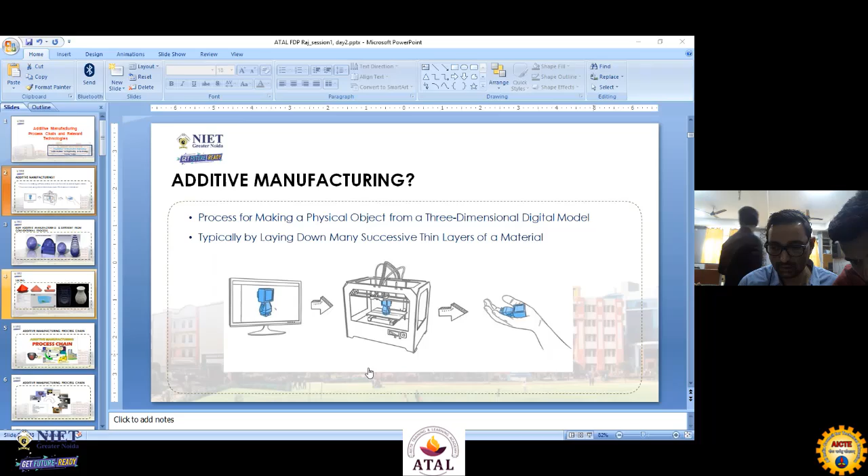So if we are talking about the definition, we can say the process of making a physical object from a three-dimensional digital model is known as additive manufacturing, typically laying layer by layer, laying down many successive thin layers of material. This is also known as additive manufacturing, and additive manufacturing is also known as rapid prototyping.

There is a story behind it. Actually, this started initially in the early 80s with the invention of the photopolymerization process. Earlier, the thing associated with the technology was only prototyping. In earlier days, prototyping was the main concern for the manufacturing sector. In those days, prototyping was done with the help of manual operations, like some cutting, some sectional cutting tools were there, and joining them together to form the 3D object.

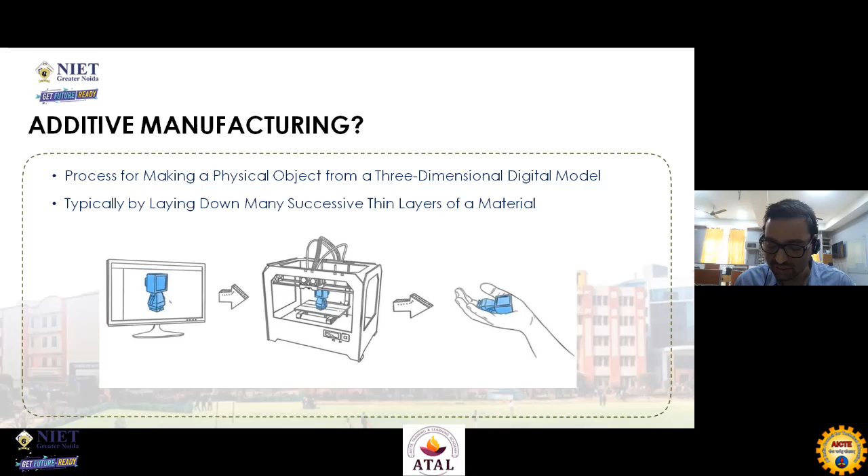They can convert their digital models into physical models. So this is how it transformed from its early stage, and today we know this technology by the common name of 3D printing. So this is all about the brief idea of how this evolved from a certain set of technologies to a number of technologies.

So here I want to say some differentiation between the two most common technologies among us. These two different technologies are, one is considered as subtractive manufacturing, and the other is considered as additive manufacturing.

Subtractive manufacturing is more relevant to the tooling side. If you look at this particular image, to achieve a specific shape, you should have a shape with you that can be transformed with the help of some machining operations. So machining is more involved. A lot of material can be washed out from the specimen with the help of some tooling operation, like cutting or grinding. All those operations remove material from the specimen to achieve the specific shape.

But the approach with additive manufacturing is very different.

So if you look at the approach related to additive manufacturing, it's very different, which creates the object by deposition of layers in a predefined thickness. That predefined thickness could be anything, which would be further dependent on your material and your technology, whatever technology you are going to use.

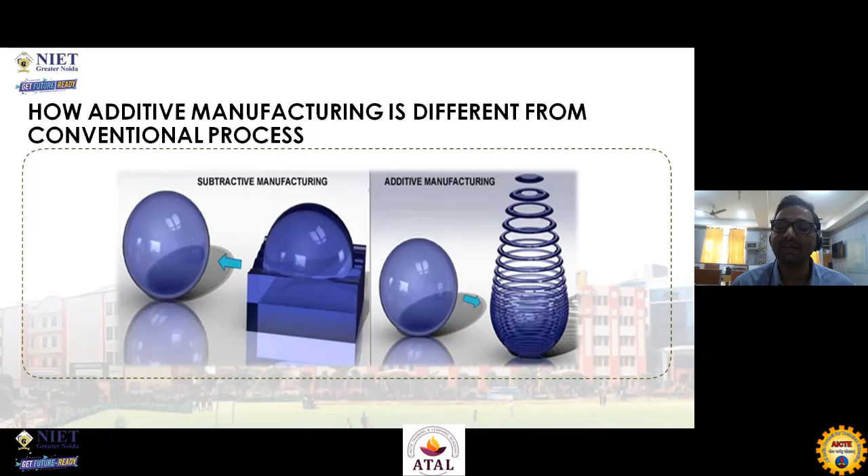So this is something which is related to additive manufacturing, which is the most important thing in additive manufacturing. Actually, there are various operations, started from the design. The basic need to create a 3D object is a design, which is also a necessity for all different manufacturing processes, so this is also required here as well.

In this particular process, one is the pre-process, which is the design phase. Then there is a building process, or you can say part generation process or transition process. And then you will have some post-processing operations along with the different approaches. We will be discussing that process chain, but slicing is the important part here.

So here you can see there are three different pictures. One is just to make you understand the object is like this—this is our object. You can consider it a digital model. Here you are doing slicing.

Slicing is just similar to cutting a potato and converting it into chips. If you join the chips together, it can give you the appearance of the potato—if your chips are arranged in the right order, joined together in the specific order they were initially in with the potato.

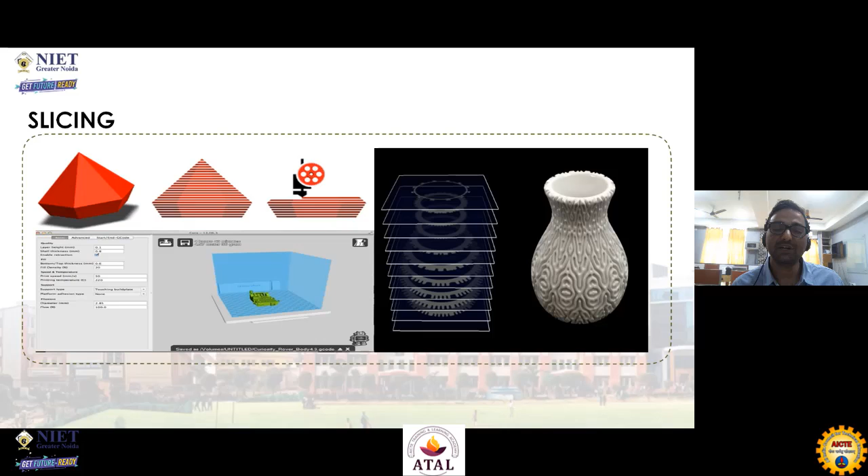So it starts with a 3D model. So 3D modeling can be taken place with the help of your CAD softwares. So CAD softwares are also associated with different categories. There are like some parametric CAD, some artistic CAD softwares are also there.

Like there are variety of CADs. Some CADs are associated with some sculpting applications. Some CADs are associated with jewelry based applications. Some are related to architectural applications. And in the same manner, the broader way of using CAD is your parametrics.

So there are some CAD softwares like Creo, Unigraphics, or you can say NX software, which is similar to Unigraphics, and then CATIA, SolidWorks. All those softwares are parametric CAD software. Then there are some artistic CAD softwares like Max, Maya. These are known as artistic CAD software, but they are all termed as the design softwares.

We call them in a generalized term a design software, but there is a lot of difference because in some softwares we create the part through some specific parametrics like vector geometries. Some parts we create out of some mesh structures, so through the mesh we create the components. So there are different differentiations among the different CAD softwares.

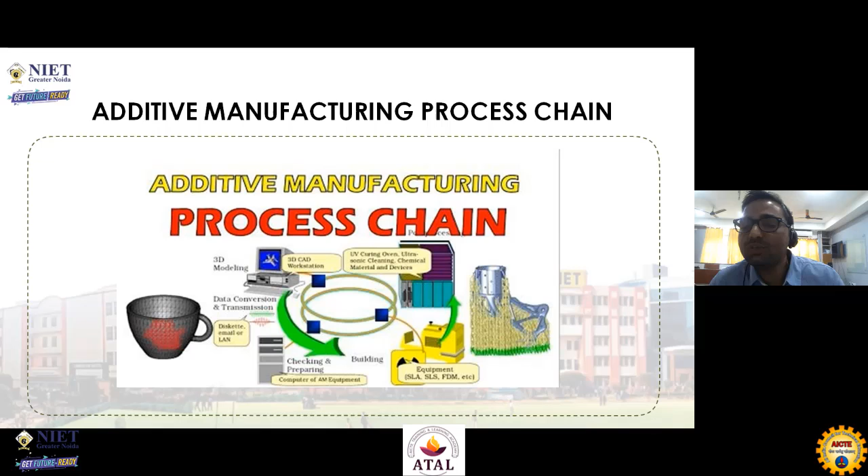This is a broader way of looking at the different process. If you look at this particular chart, you must have seen it before as well, but this will give you an idea how the process works from scratch. So the scratch part is the CAD part, which is obviously the design part. Then the design can be further converted into the STL file format.

You must be thinking that if people are aware, then it is great, but if somebody is not aware, I will mention one more thing. There are some terms like STL. STL is nothing but the file format which is associated with the mesh family. Mesh is a file format which has triangles in it over the surface.

While you are having a surface, like when you are exporting a model in STL file format, it will be converted into fine triangles. The number of triangles will cover it, and the more the number of triangles, the more the resolution will be with the design. If less the number of triangles, then it is totally dependent on your chord length. Chord length is the side, or you can say a vertex of your triangle, in layman terms, but it will be totally dependent on your number of triangles. If your number of triangles is more, then your resolution will be high. It can be understood with some further slides, which I will explain.

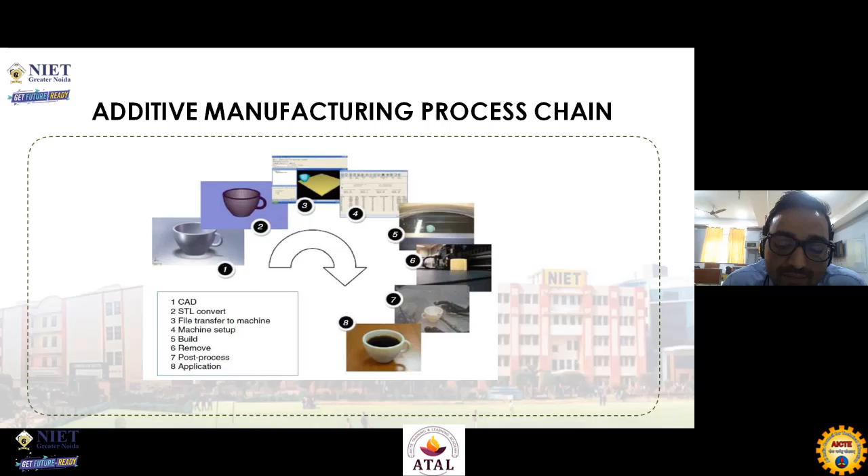So in order to do the resolution, triangle distribution is not dependent on the size of the triangle, it will be dependent on your resolution. This portion is again associated with the specific application. If you are having a single square or rectangle surface, you will find only two triangles over there if it has a plane surface. But if it is not a plane surface, the distribution of triangles will take place according to the resolution. So resolution is the important thing here.

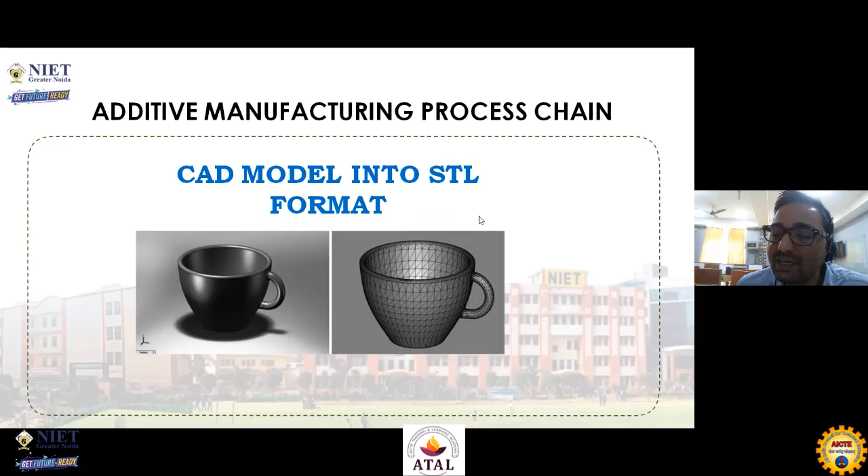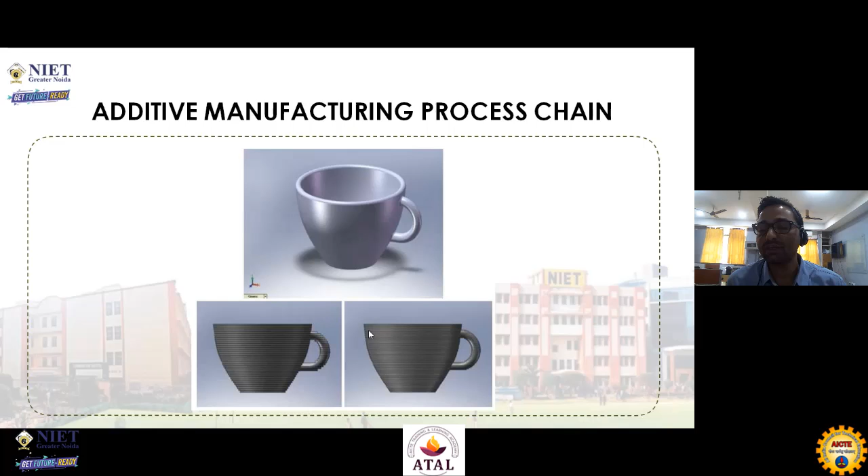That plain surface can be deposited in the z-axis. If this is a curvature surface and this is a plain surface, the plain surface can have higher or lower resolution, but that surface should have the higher resolution. It means the layer thickness at this particular section should be higher, lower, and at this other section should be higher. In that way, you will save some time in order to build the component. This is how we implement additive manufacturing specific design rules in the process.

Then the software is also very important, because the software itself has the capability to accept those designs according to our requirement, our application, and our system. Software has that potential. So these are the design rules which we follow. Design considers those rules, and the software together gives you a design related approach.

Then the further process is related to your system. Your system will have three further things: one is your hardware, which is known as the system, second is material, and third is process parameters. It is just similar to your computer, which has software with it, like an operating system, in terms of material and process parameters in terms of your process, whatever process you are doing with your system.

Like when you are playing a game, according to the game you will choose your processor. In the same manner, your system is there. System means whatever system you are using, it is SLA, SLM, or EBM, MJF.

FDM, or whatever system you choose, will be dependent on your application and material—whatever material a machine is capable of printing. If you have an FDM machine, can you print titanium? No, it won't be possible. So all three things—system, material, and process parameters—depend on your application. For example, if your application is biomedical, you should have a biocompatible material. You'll choose the biocompatible material, then choose the system capable of operating that material, and set the process parameters accordingly. All three things are interdependent.

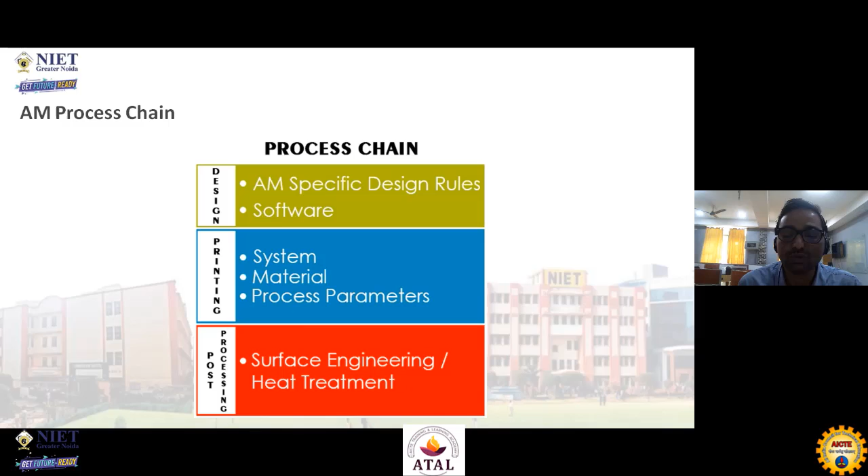So there is another thing associated with modeling which I believe I have already explained. There are some softwares associated with parametrics, some associated with artistic design, and some associated with 3D scanning operations. With the help of 3D scanning, you can do the scan.

There is a process known as CT scan. CT scan is a volumetric scan kind of process. In normal scanning, it will capture only the surfaces of that particular object, but in CT scan, it will scan the surface by volume, layer by layer. You can set up the number of contours with the CT scan machine, then it will capture the whole surfaces layer by layer, and in that way you will have the internal parts as well.

Those parts can further be exported into a DICOM file image. That DICOM file is a medical file format that can further be converted into STL file format. In that way you can also achieve 3D printing. Mostly you will be getting the outer surfaces of the component; the rest you can control according to the technology, like whether you want to fill it with 100% material or partially fill it. That will depend on the technology.

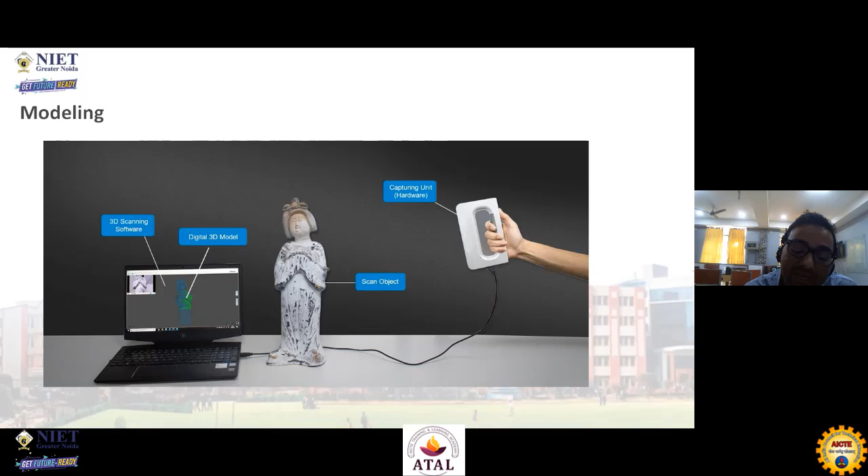So there are some advantages related to this technology: complex shapes can be created, freedom for design is there, and customization. We will show you some examples so that you understand what these different points state.

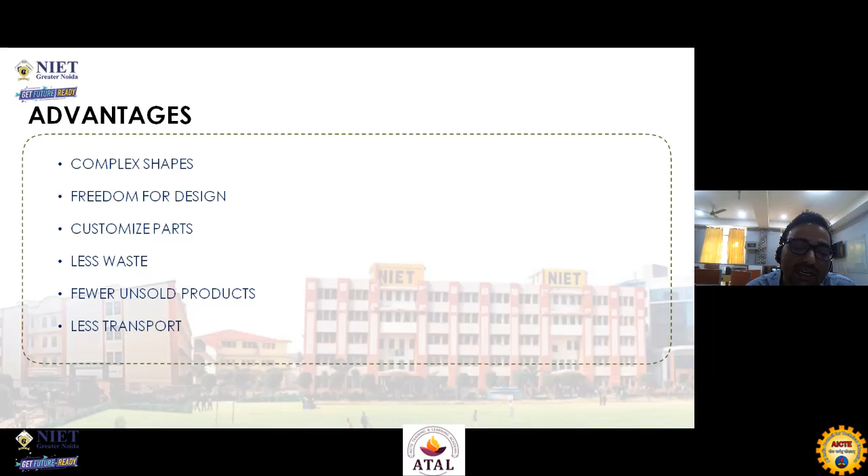These are some complex shapes which you cannot create with the help of conventional processes. You can create them with additive manufacturing, because these are very complex shapes, and even these complex shapes can be designed with artistic software. You cannot create those designs with normal parametric software. If you try to create these shapes with conventional processes, either it is not possible, or you have to incorporate a lot of tooling operations.

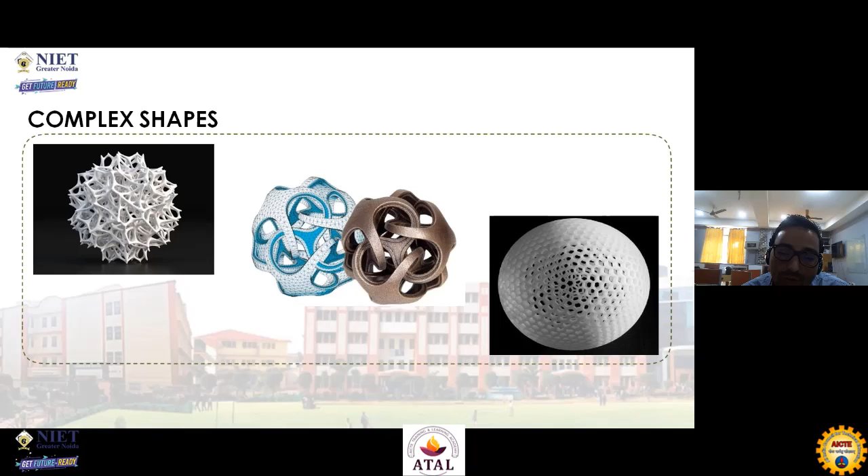These are some examples related to freedom of design. You can do it in the fashion industry, whatever the shape. Sometimes you want a product to be built that is not available in the market, but you have a feeling like, if this kind of product could exist, then I could do my stuff in that way.

In this approach, you can go with the additive manufacturing approach. Whatever you are thinking now, by the next day you can turn it into reality. Whatever application you are thinking of in your mind, you can convert it very soon. The process is not slow nowadays, it is very fast. If you look at the market, you will find that a single segment of a particular automobile industry will have a lot of different options—if a company is driving two segments of a car, then a single segment will have a number of cars in its portfolio.

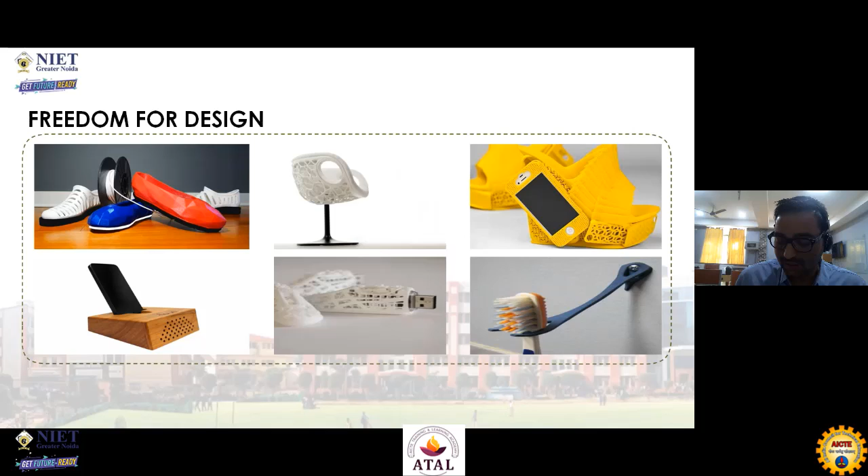These are some customized parts. Customization could be there according to your requirements, which was not possible earlier. With the help of this technology, and obviously with the help of design—because design is the most important thing in this whole process, the primary and basic thing—on the basis of design implementation and the capabilities of the technology, you are able to create customized parts. Those customized parts could even be better than the actual components, if you compare them with the natural leg or limb of an individual.

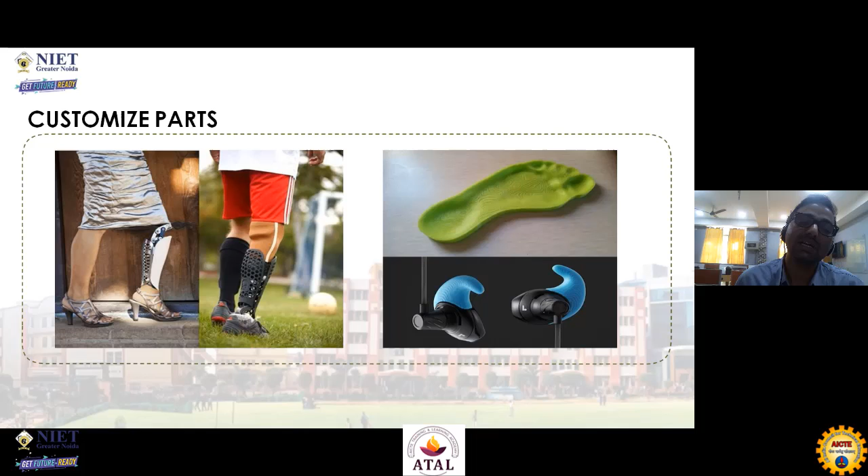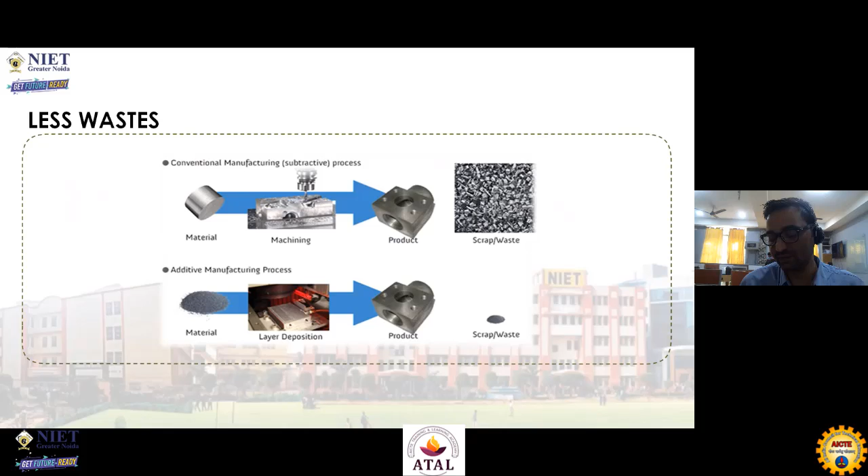Less transport. Here I would mention one thing: if you have a car, your car has a spare wheel. For the worst scenario, you carry a spare wheel and some tools with you, like a jack and a spanner, for your safety while driving on the road. And if you are driving on the road, you will hardly be 10 or 15 kilometers from a repair shop.

But if you are traveling on a ship or a spaceship, there is a difficulty in carrying spares. If you carry only a single spare, it will not solve your purpose. You have to carry a great inventory of spares. So in order to reduce that cost, carrying that inventory will obviously fill some space and also affect the overall weight of the ship or spaceship.

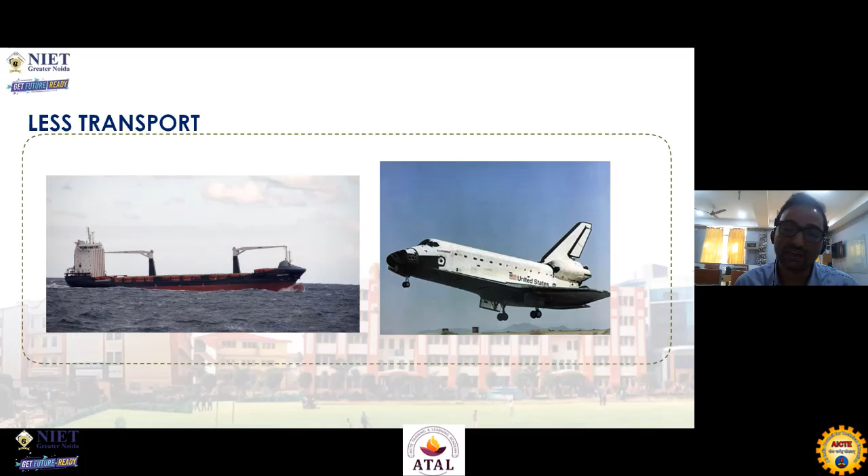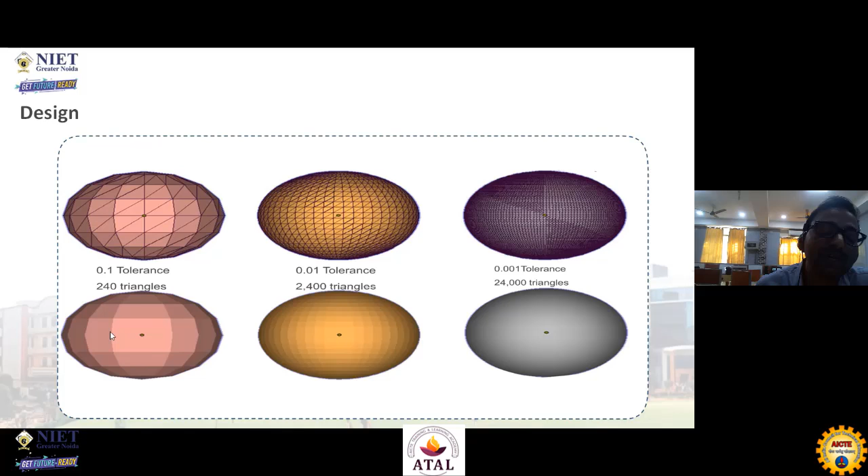Here is a case study related to conventional design. If we are transferring a conventional design more towards the DFAM favor - if you are having a conventional manufacturing process, then you will be having a conventional design. This is a pedal of a cycle.

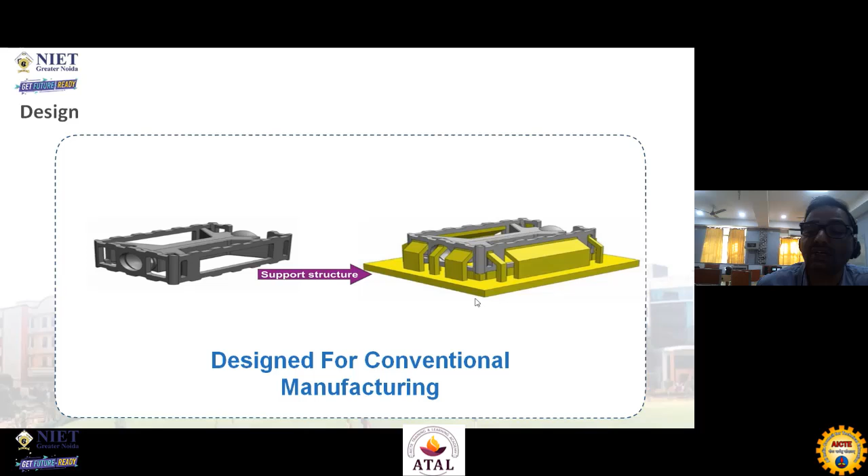If you transfer the same design to the additive manufacturing process, you will find a lot of support structure, and that support structure is further a wastage. You can do some modifications on the component to reduce the support structure, but those modifications further increase the weight of your bike pedal. So that bike pedal has increased its weight, but has almost removed the support structure, except this.

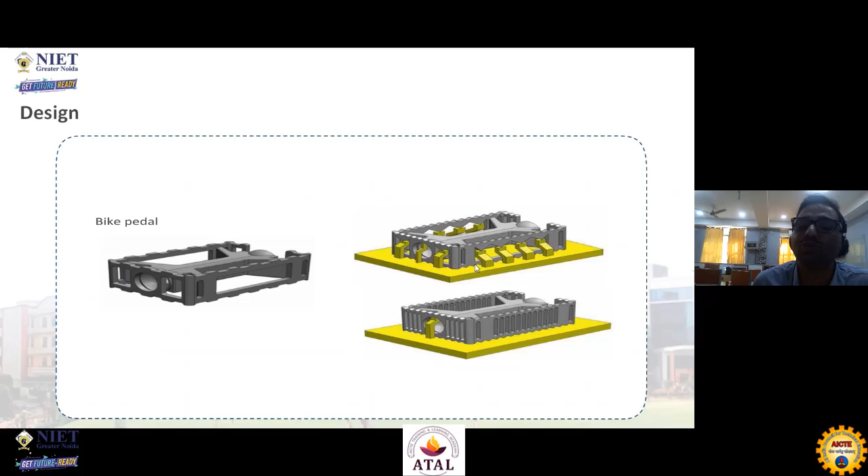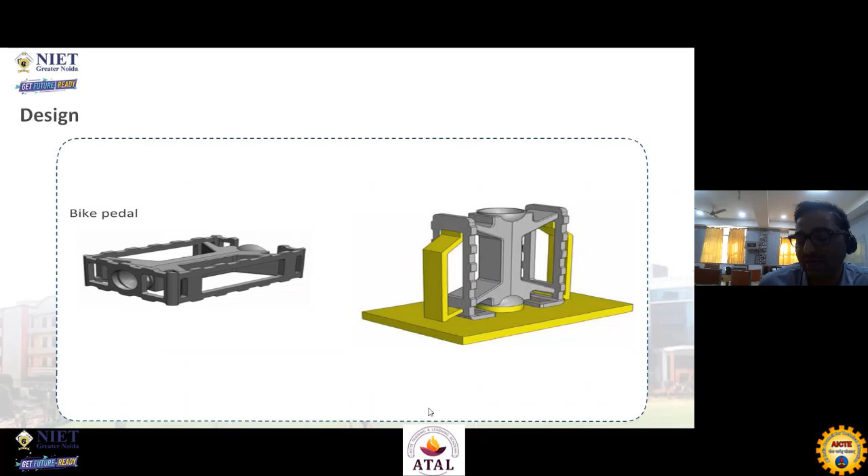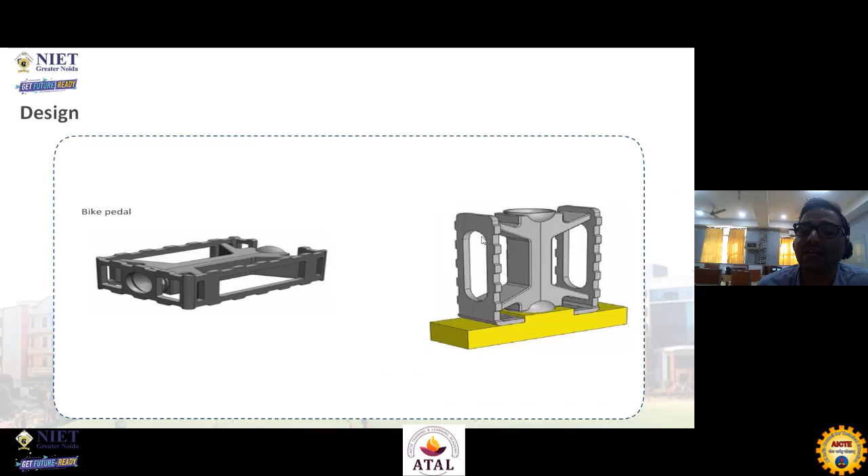You can further deal with some orientation, since we have the capability to play with orientations. So you can orient the component in a specific way - earlier we were printing it in the flat format, but now we have oriented it. With further modifications, there's a reasonable amount of weight increment that is not harming much, but we have reduced the support structure at this point. Still, it is a conventional process, and we have to increase some weight, even though we have switched to the additive manufacturing process.

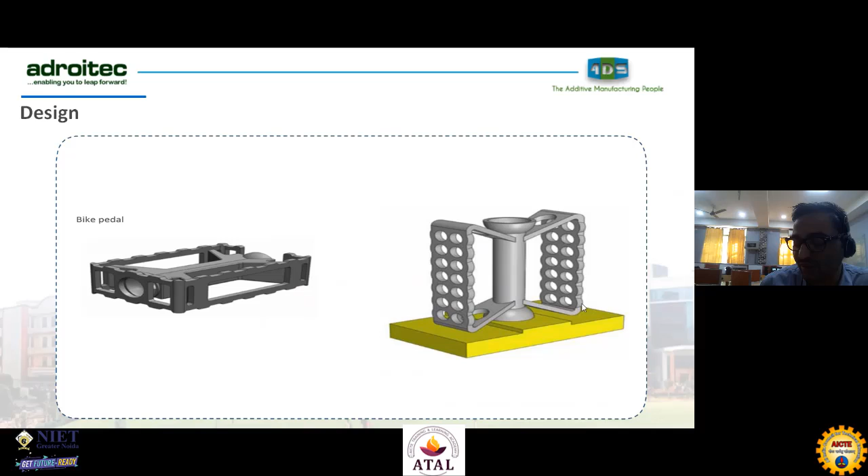But why can't we use a design like this? Because this kind of design is not very feasible with the conventional process, as it will increase your efforts there. But in the additive manufacturing process, there are no such limitations. You can create designs like this, and even more attractive designs than the previous one, without creating a support structure. You have all your choices. So this is how DFAM, along with additive manufacturing, lets you improvise different designs which already exist in conventional manufacturing.

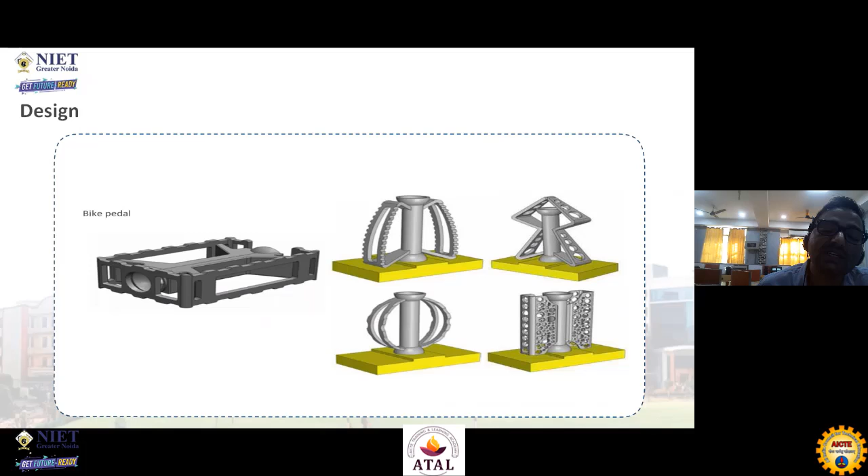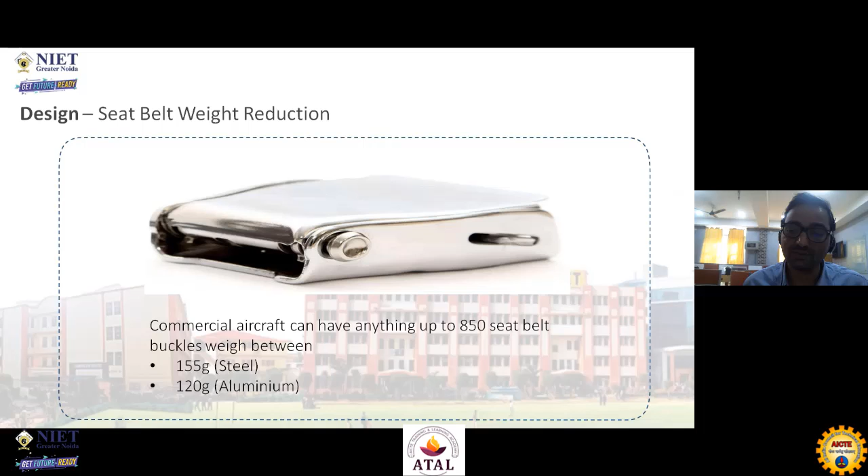If you make this design with a conventional process, it will involve a lot of processing and your effort will increase. But if you do it with the additive manufacturing process, your material will reduce with no strength compromise at all, and you will save 68 grams on every seat belt buckle.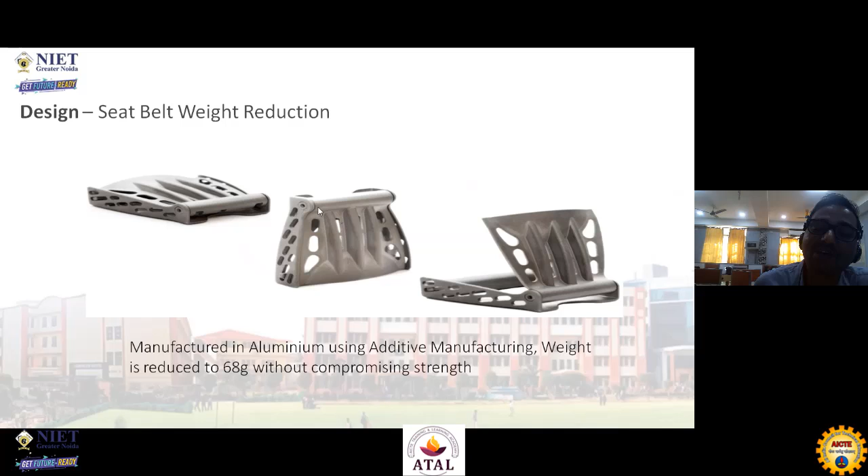These are some applications associated with additive manufacturing: automotive, marine, aerospace, medical, dental, prosthetic, engineering, architecture, and many more. These are some popular applications, but there are many more - food industries, tissue culture industry, medical industry with its subcategories, and aerospace also has its own categories. So there are different industries - you can find it everywhere.

This is one technology related to liquid-based additive manufacturing systems. In liquid-based additive manufacturing, you have the stereolithography process, also known as the vat polymerization process. I will explain only the principle - the working, as we are running out of time, we cannot discuss at this moment, but I am explaining the principle here.

The tank is filled with liquid polymer, which is in the form of a monomer. So liquid polymer is nothing but a resin which is a monomer, and that can be cured with the help of a UV light source, and that curing will turn that particular monomer into a polymer. That process is known as polymerization. So photopolymerization has a light source which acts as a catalyst for the monomer, converting it into polymer, and that polymerization gives you a solid shape.

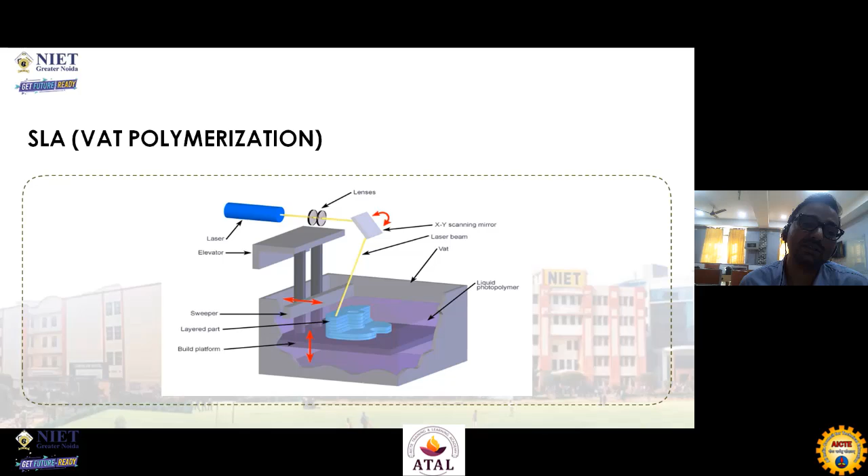Then there is a material jetting process. Material jetting process again can have your monomers with you, that resin material with you. That resin material can be deposited, and your head can have some fusing lamp. That light could be a UV light. With the help of that it can set.

Apart from that, you can have some different material, slurry material, that can be deposited. With the help of heater or the blower, that can be set. So this is how this will work. This is the mixture of your FDM technology and the SLA technology. Or you can say there is a spray which gives you the impression of the FDM technology.

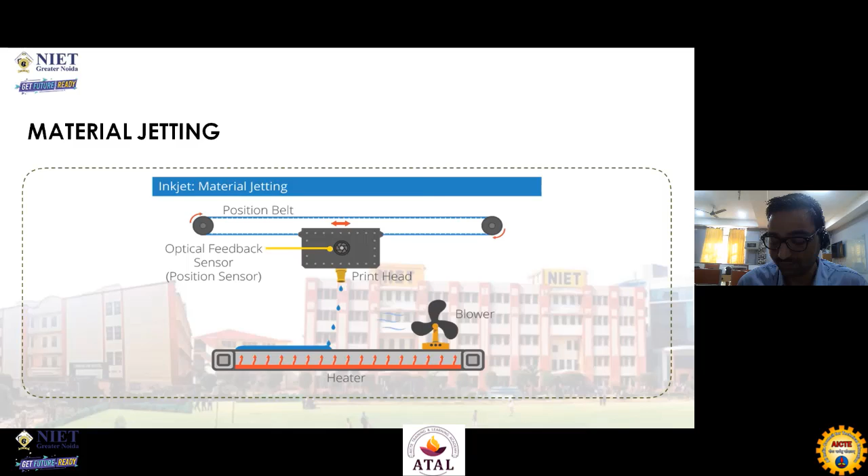And this is SLS process, where the sintering process is being carried out. So with the help of a roller, we deposit the material at a specific layer height. That specific layer height will give you the layer resolution of the component.

And the beauty of this technology is that in polymers you would not require to create the support structure. So the support structure will be compensated with the help of this powder material. So powder material will allow you to give that support to those overhangs. So this is the beauty with the technology.

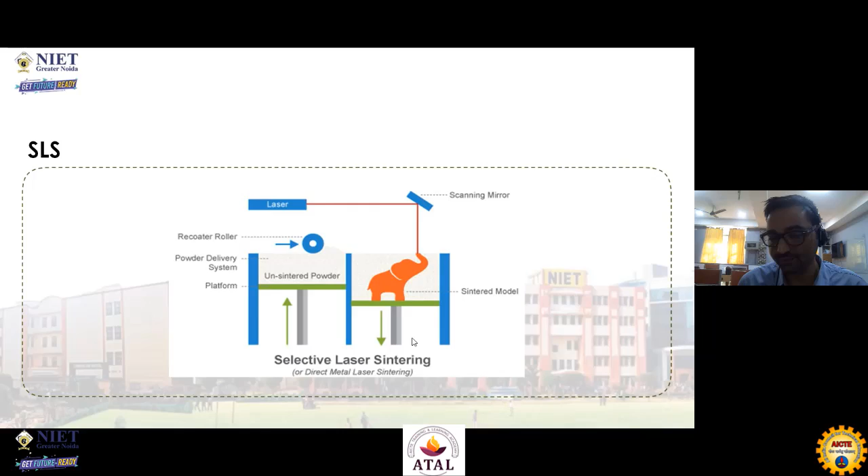This is the binder jetting process. This is similar to your SLS process, selective laser sintering process. So in selective laser sintering process, there was a laser. So laser was sintering the material in order to bind the powder form material, and that technology can use polymers

as well as metal. And with this particular process, you are having a binder in order to join the powder form material. So this can be used indirectly for creating the indirect metal components. This can also create some components out of POP material and multicolor materials as well.

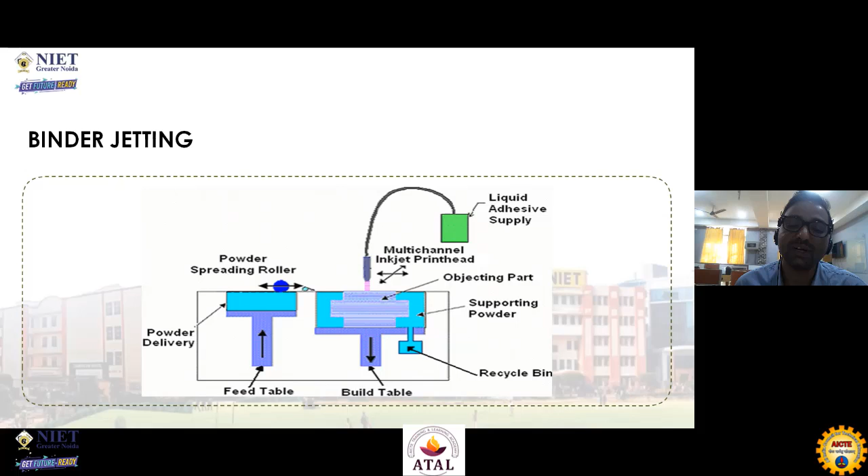So there is a simple principle: the binder binds the layers of the powder material, and in this way your product gets formed. This is laminated object manufacturing, comes under the category of solid based additive manufacturing system, in which a roll of paper or a film is used, and it is also there with the ultrasonic consolidation in metal. But in the consolidation method, there is a welding process involved and a machining operation involved.

But here the roll, this is the fresh roll of your material, and this is the consumed roll. The consumed roll, with the help of a laser or some cutter, it cuts the specific contours of layers. Then layer by layer deposition occurs with the help of this heated roller. So in this way your component gets formed, and all this extra material can be taken out after completion of the component, and then we will get the actual shape of the component.

This is actually we can say additive in one term, but in another term it can also be termed as subtractive manufacturing, because there is a lot of material which is wasted over here. So in that way we can say it's subtractive as well. But as we are depositing layers, so by that particular definition we can call it an additive manufacturing process.

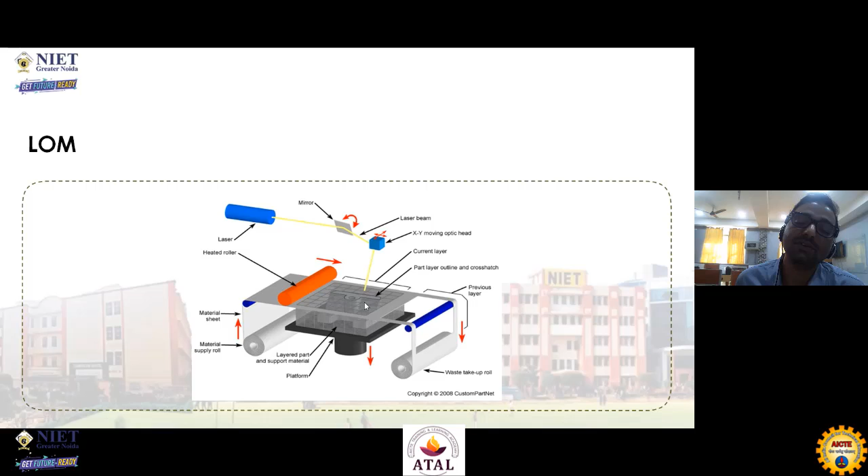This is the FDM technology, which is the most common and mostly most accessible technology with individuals. So here this wire form filament material is there, which is fed with the help of a controlled gear and roller mechanism. That controlled gear and roller mechanism is having a stepper motor, and with the help of melting at the end point, this is known as hot end, which is associated to your feeder.

This unit is known as feeder. This whole apparatus is known as extrusion assembly. So that extrusion assembly extrudes the material in molten form. That molten form material is deposited with the help of a fine nozzle. That nozzle could be made up of brass, made up of SS.

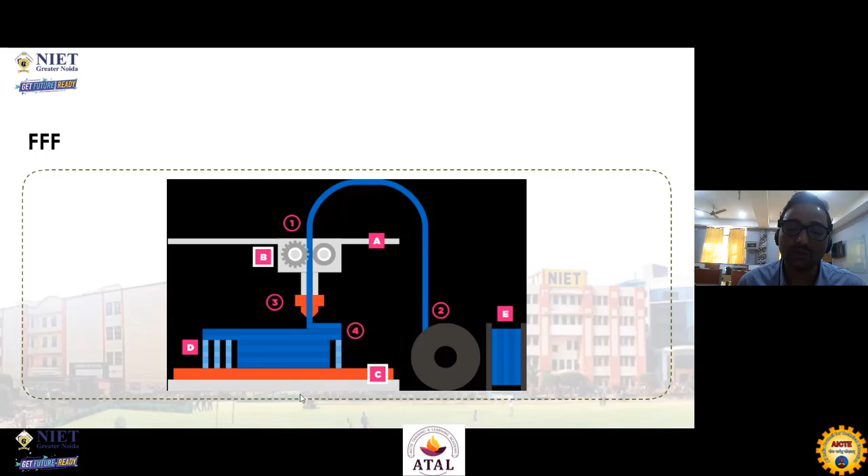The material is dependent on the material which we are using, like we are using PLA, ABS, and in those cases we can use brass. For high-end engineering materials we can use SS nozzle, so that deposition can happen. Apart from that, we can have multiple nozzles as well here, so the deposition takes place with the help of extrusion process. So this is how it will work with FFF process, fused filament fabrication.

These are some examples of design for additive manufacturing process. So in design for additive manufacturing process, you will be optimizing the data, optimizing the process, because now in order to achieve those shapes, you need not do some extra process. You will be creating it in a single go.

So if you are doing it with the conventional approach, then in those cases, you will be creating different cavities with the help of tooling operation. That will take further time, and also that will have some further cost over the component. So these are some examples of the DFAM approach.

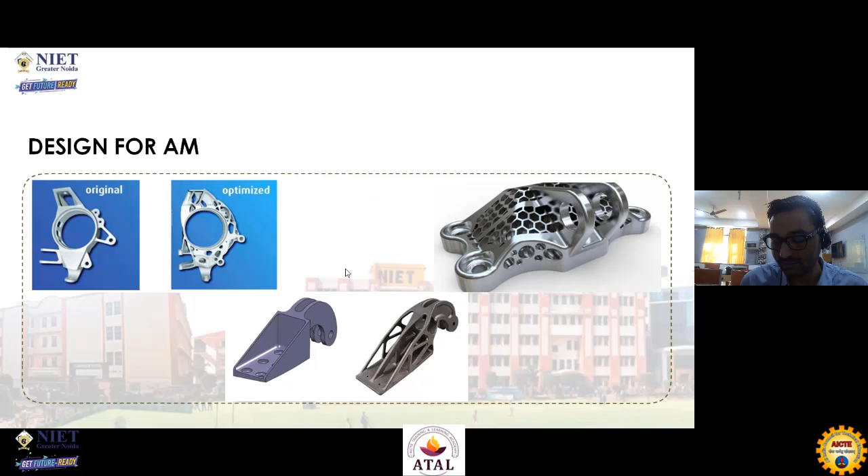So these are some industries in additive manufacturing. These are the direct uses, as you can see here. This is a component in which we can do directly injection molding process. So this is a die.

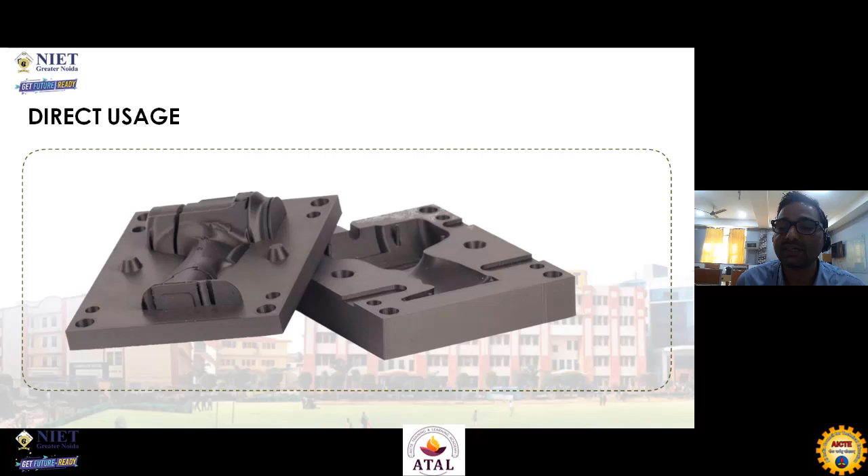This is the direct use of titanium material that can be implanted into the skull. So this is an example of that.

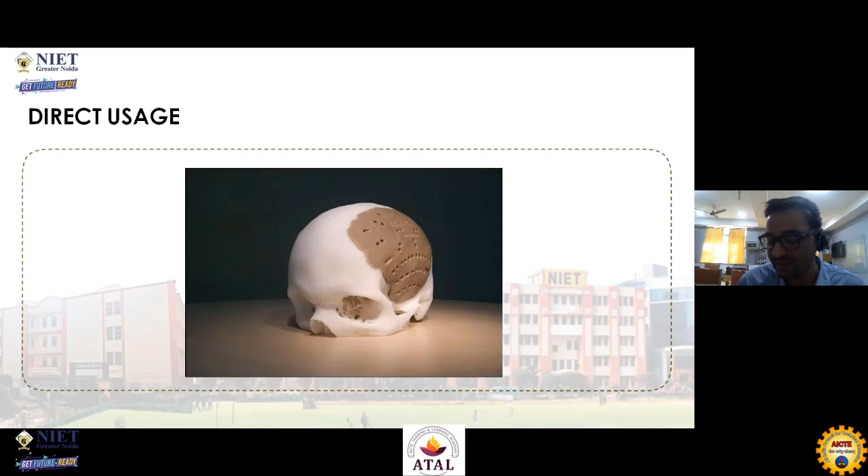This is the direct use in terms of fixture. That can be the welding fixture, the assembly fixture, or the machining fixture. So this is the example of fixture. That can be the direct use of the additive manufacturing process, because the precision is there.

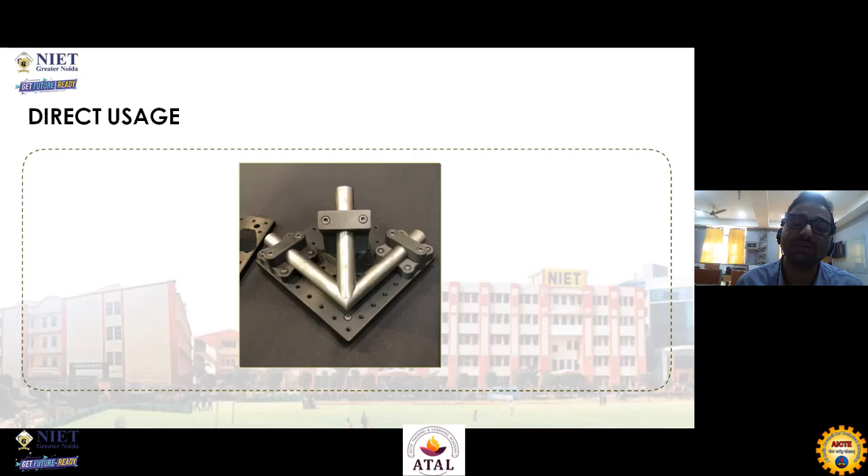And due to the precision, we can also do the gauge. We can create the gauge out of the technology. So gauge can be done in order to measure the dimensions of the component produced with the production unit.

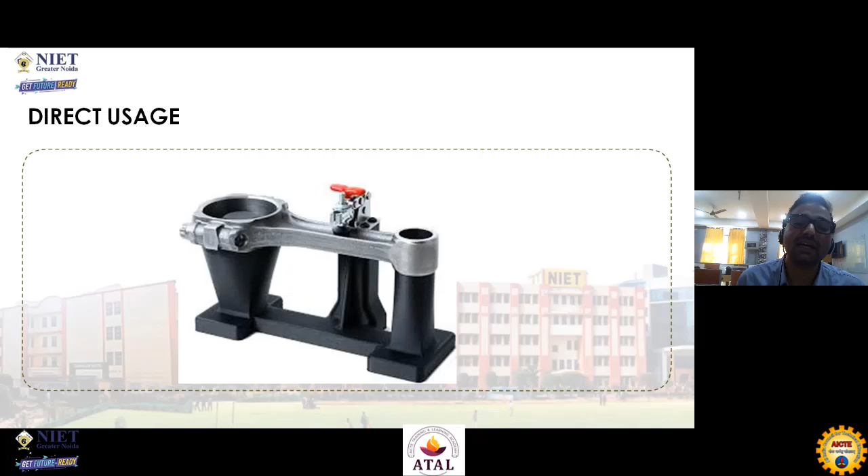And these are some indirect uses. We can create the master out of the technology, and with the help of the master we can create a silicone mold, which could be done with the help of a vacuum casting process. And there, if we are not using a vacuum casting process, we can directly use the silicone liquid, and out of the master we can create the cavity.

That cavity can be created with the help of different polyurethane material. We can fill that cavity, and then we can create a number of components. It is very good for small production, small batch production kind of stuff. So this is a very great application.

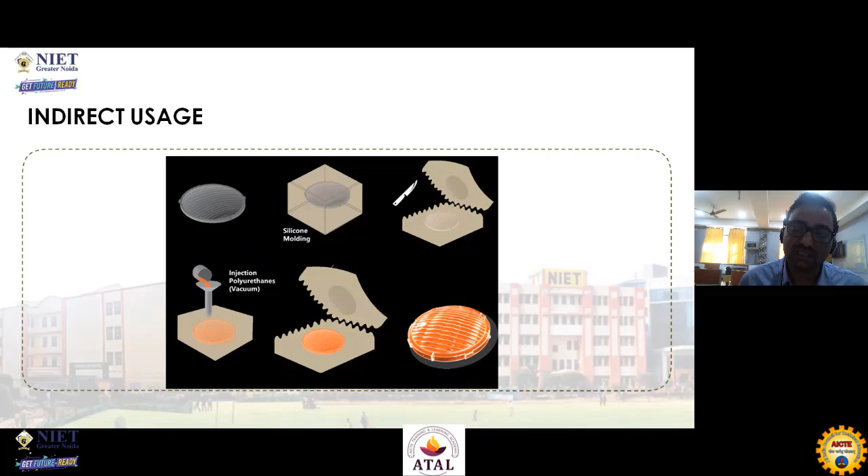This is a jewelry kind of application where we can use the investment casting approach. We can create the master out of wax, and that wax can be drained out in two ways. One way is to sinter that particular POP mold, and you can drain out the material.

Another way is to pour the molten material liquid, and then it will vaporize. So there are two types of material: one is 0% residual material, and one is that material that can be drained out by the sintering operation.

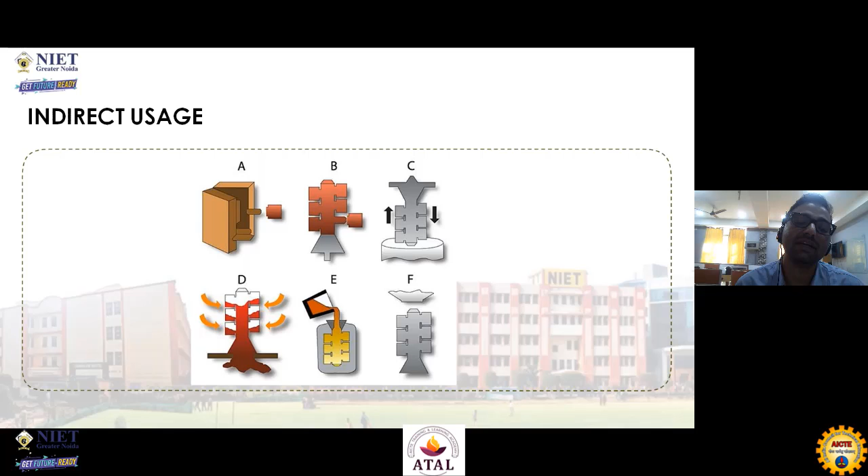This is another process where we can create the impressions for carbon fiber or glass fiber fabric. Then it can take the impression.

There is another approach to do this. We can create this component with the help of dissolvable material, that can be PVA or HIPS, and we can take the impression. That is more suitable for complex applications.

This is quite simple. We can take it out, but if we are not able to take out the component out of this particular structure, then we can use that lost pattern. So that lost pattern can be drained out in the water or the prescribed solution.

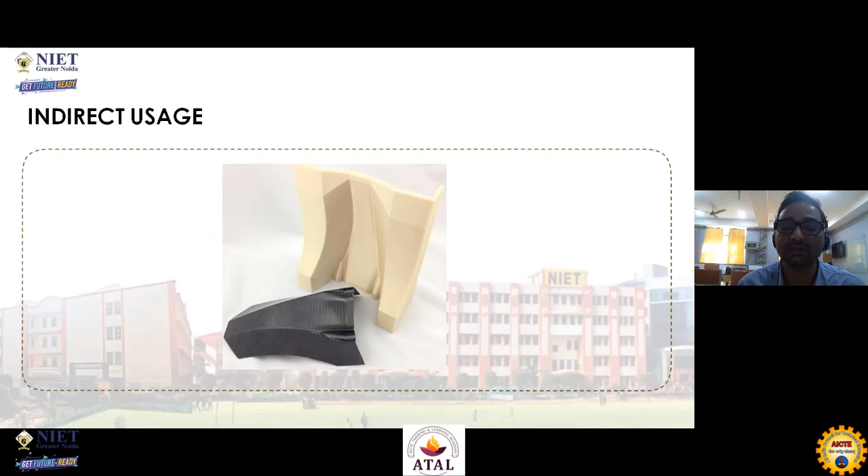Thank you, sir. Professor Rajkumar, sir. We got one question there, there is no name. What is the resolution? He asked, what is resolution? His name is not displayed, it came in as anonymous.

Hello. Yes, you're audible, sir. Yes, sir. One participant sent the question, what is resolution?

Okay, resolution is something like you are having a megapixel camera. So in a megapixel camera, you have the concept of PPI, pixel per inch. This concept states that 1 inch square has that much pixel, like 12 megapixel means 12 into 10 to the power 6 pixels are there per inch square.